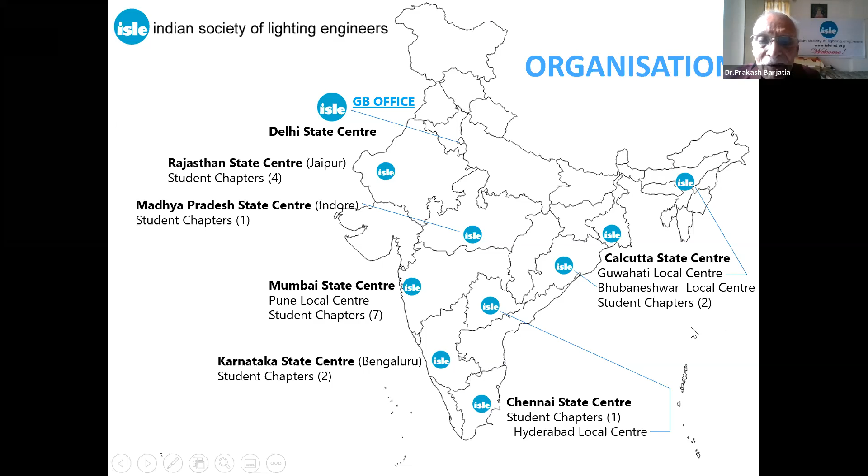ISLE works through 7 state centers covering all 4 metros, in addition to Karnataka, Rajasthan, and Madhya Pradesh. So these are 7 state centers. Then there is a provision of local centers at Bhubaneswar, Pune, Hyderabad, and Guwahati. We also have student chapters in different states. Today there are 17 student chapters in the country.

We are closely associated with the Bureau of Indian Standards, Ministry of Power and Renewable Energy. Also internationally, we are working together with the IES Illuminating Engineering Society of North America, Lux Pacifica, Institution of Lighting Engineers, IES, and the SAARC countries.

Our present governing body member of ISLE for 2015 to 21 is being led by Mr. Dilip Kumar, who is the CEO of K-Light Group of Industries. As far as the Karnataka Center, this program is being conducted by the Karnataka State Center, and the chairman is Mr. R.C. Krishnachari, along with Mr. K. Kailaslevan, Honorary General Secretary, and Dr. Vidya H.R., Honorary Treasurer. Other members include Mr. Satyendra, Mr. M.S.N. Swami, Mr. Bhavani Prasad, and Ajay Gupta.

This committee has taken over recently, and they are doing very good work. The first activity they have done is the MOU with colleagues at the national centers. As I mentioned, we are working closely on the National Lighting Code, and this is being done under the leadership of Dr. Rajat Mandal, Honorary General Secretary of ISLE.

Accepting the challenge of COVID, about a year back we started a certificate course in basics of lighting and illumination, a 6-month e-course, which was addressed by 63 distinguished lecture experts not only from India but from all over, and which was attended by 76 participants from all over India and also South Africa and Saudi Arabia.

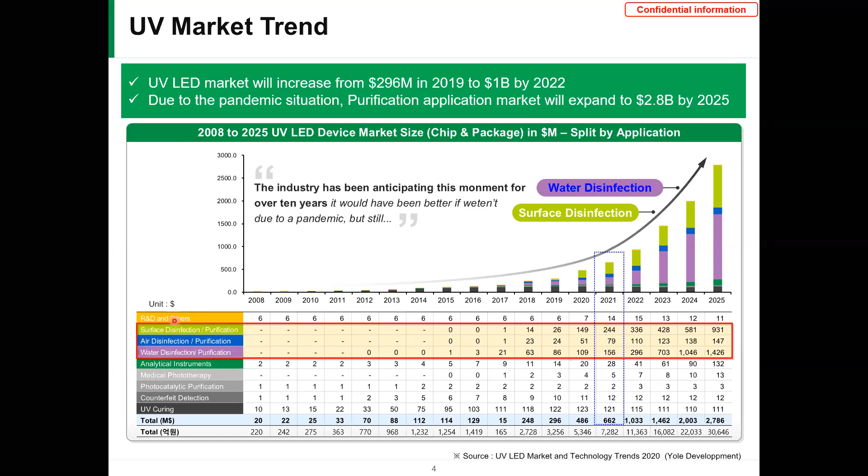So we are focusing on these three kinds of disinfection and purification applications. We compared the 2020 and 2025 UV LED device market size—air disinfection, surface disinfection, and even water disinfection will all grow hugely. So we are focusing on these three kinds of applications.

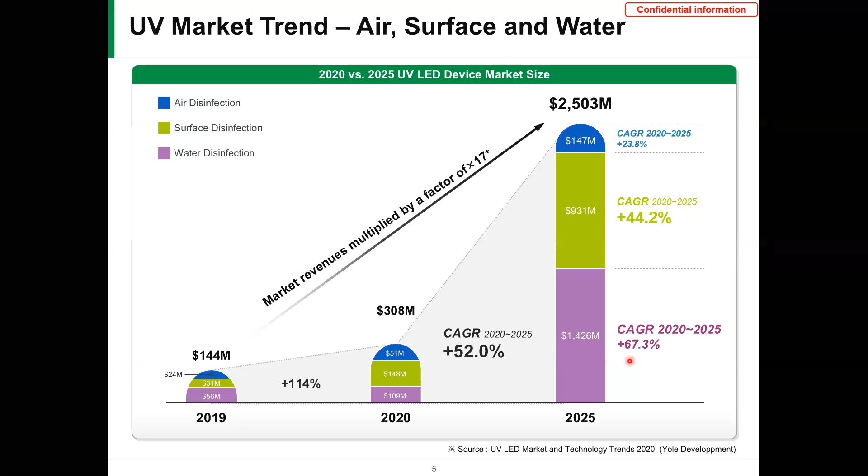So what is ultraviolet, like UV? UV is functional light. Sunlight delivers UVA and UVB to land, while the ozone layer cuts UVC. Due to this reason, UVC light cannot reach our land, so we cannot use natural UVC—we need UVC LED.

Currently, more people are using UVC lamps, but we developed a UVC LED. This technology is used in many small, adapted devices, so we can adapt it into everyday life, everywhere.

So UVA, UVB, and UVC are the different wavelengths. UVA is the 320 to 400 nanometer range, UVB is 280 to 320, and UVC is 200 to 280. We use UVC light for the sterilization function, and for UVA we use deodorization, like air purification with a photocatalytic filter, and some people use UVA light in insect traps, and some curing applications adopt UVA LEDs.

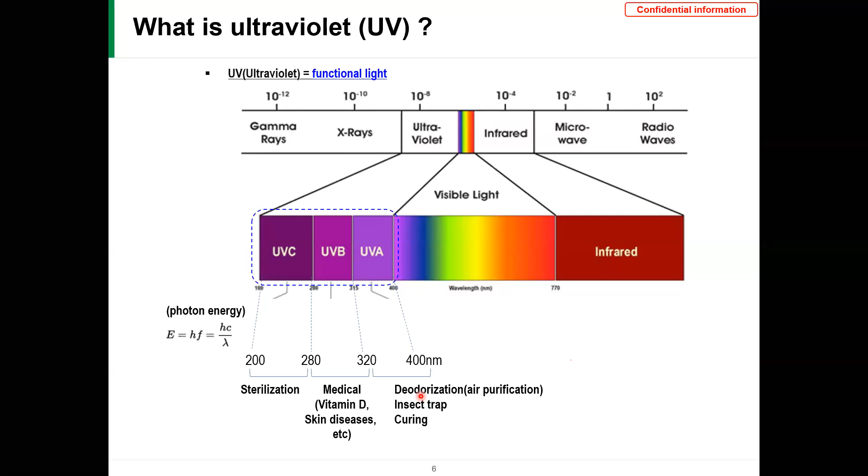So our company is leading the application, and we can be a solution provider for lighting, automotive, and IT applications like display, mobile, and IR. And the last one of our business model is UV, and we are developing UV systems or solutions to provide you. So for the Violeds technology, I will explain.

So the Violeds solution is for home appliances. All the home appliances: air purifier, refrigerator, air conditioner, even the dishwasher, some kind of water-using application. We can disinfect air, water, and surfaces, reaching 99.99%.

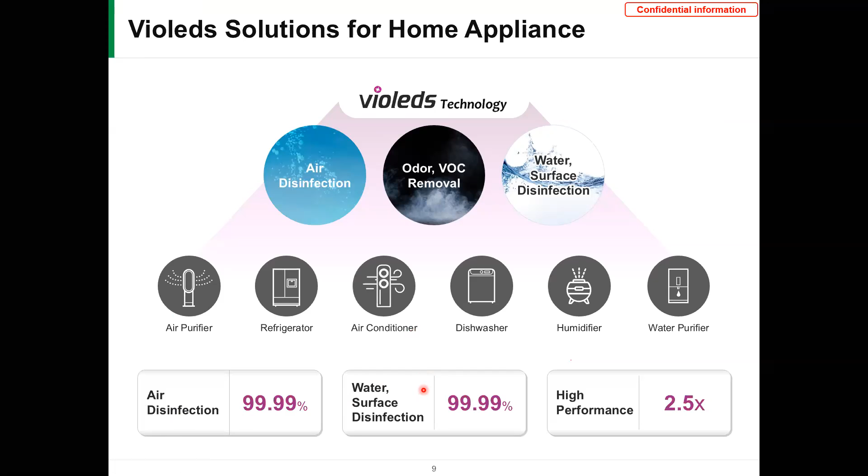So why do customers use UV LEDs? Compared to the conventional UV lamp, the UV LED is very small. That's the first good point, and a very good advantage is the warm-up time. With a UV LED you only input some voltage or current value, and the UVC LED can light immediately, whereas a conventional UV lamp needs turn-on time. Due to this, the disinfection time is delayed.

And the second one is heat generation. UV LEDs have low heat generation compared to the conventional UV lamp. And UV LED is an eco-friendly technology, so no mercury, no ozone, and the energy consumption is lower than the conventional UV lamp. Our only concern is the low power and higher price than the conventional UV lamp, so we are focusing on developing high-performance, low-cost versions of UV LEDs.

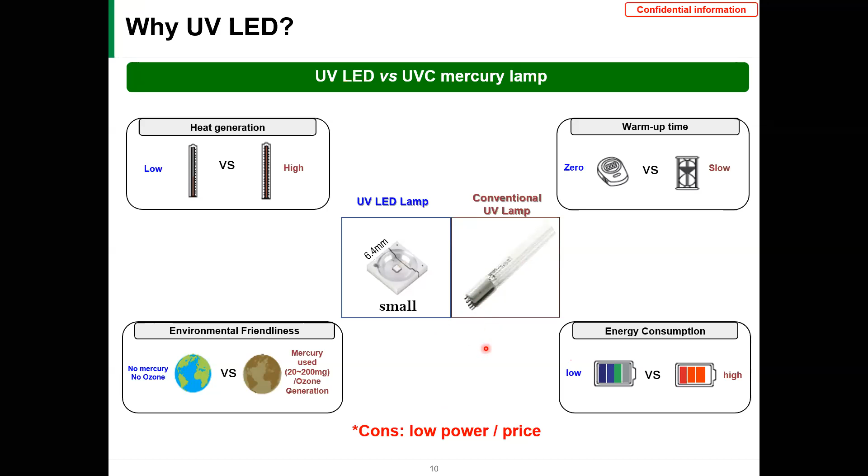So what is the Violeds technology? It describes the know-how in developing, manufacturing, testing, and validating UV products. We use different types of wavelengths, and we can provide distance, angle, power, and time. We combine these five kinds of factors, and then we can give the solution to our customer, and the customer adds value to their products and makes a lot of money. Yeah.

So what are the different disinfection methods? When UVC irradiates a surface, it damages pathogens like E. coli by breaking the DNA. So the next one is easy. In UV disinfection, the DNA structure is destroyed when UVC is irradiated.

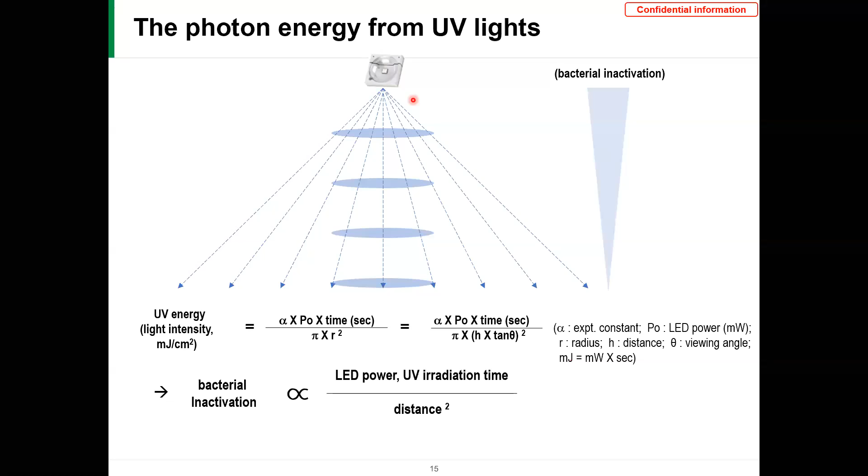So we have a simulation lab and a testing lab, so we can give you the solution or some guide to using our LED. We already tested the SARS-CoV-2 virus; the condition is 2 centimeters and virus suspension, and within 1 second we can sterilize with 99% efficiency against SARS-CoV-2.

So we have a lot of data, and we can guide you on disinfection, which wavelengths you can use, and what the disinfection time is. So this is the test result for SARS-CoV-2 in a Korea testing lab; the condition is almost the same, and we tested SARS-CoV-2 disinfection using our 100 milliwatt UVC package.

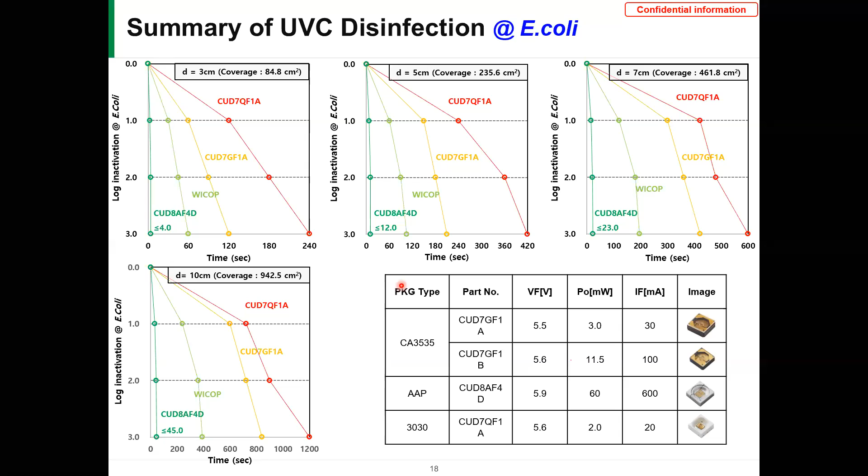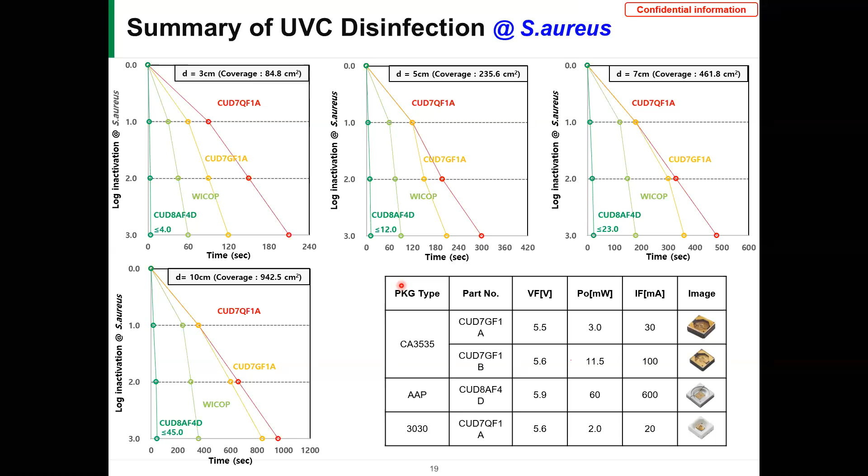So you can see our test results. Yes, we can guide you with this kind of test result. This is E. coli, and this is Staphylococcus aureus. Our internal lab can use these two kinds of bacteria, and if you need another kind of virus or a different type of bacteria, we can connect to our third party lab, or even in India, RC can help us with testing. So this is our very good solution that we provide to you.

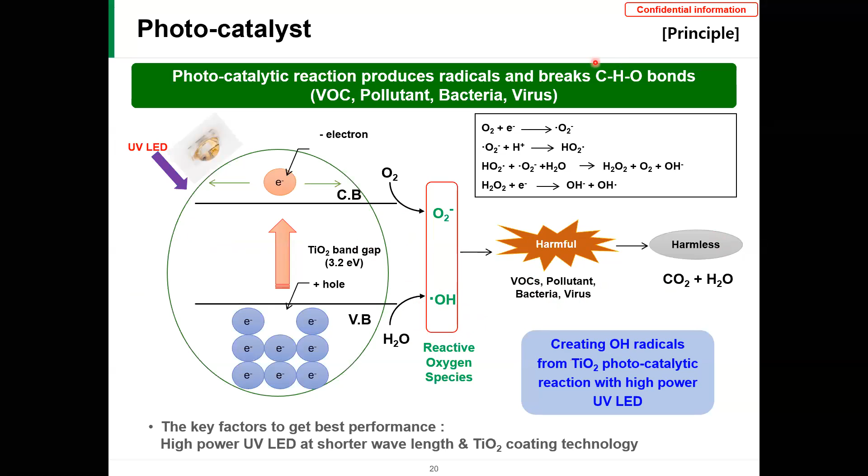And the last one uses UVC only, and this page shows the photocatalytic filter and UVA LED. This is titanium dioxide, and when we irradiate it with UV LED, titanium dioxide generates reactive oxygen species, which can remove harmful gases like VOCs and pollutants, bacteria, even the virus, and reduce some of the harmful compounds.

Our technology uses under 388 nanometers, and we use UVA 365 nanometer. Titanium dioxide absorbs about 70% at 365 nanometers, so we can use 365 nanometers. And this is the report showing we didn't generate ozone using the photocatalytic filter plus UVA and UVC LED. By the Korea standard, less than 0.005 micromole per mole, we didn't detect ozone. It's like a background concentration.

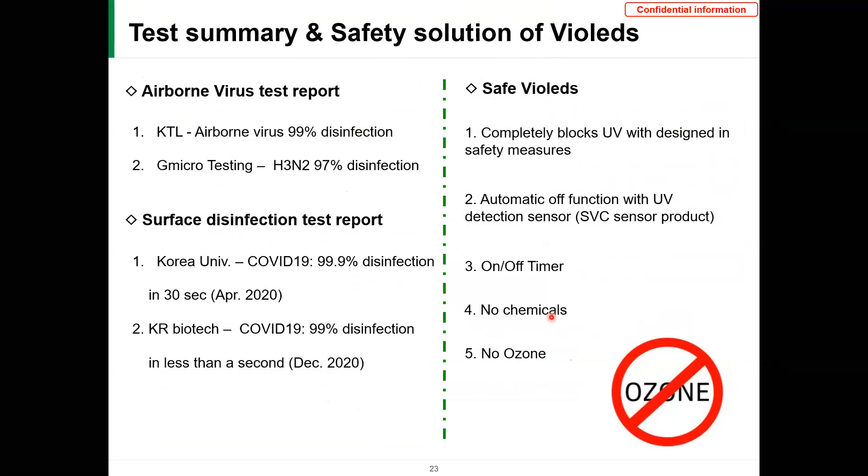So the test summary: our safe solution can kill airborne viruses and disinfect surfaces, a safe Violeds technology. Almost all home appliance companies use ionizer technology, and ionizer technology generates some ozone. Our technology has no ozone, and the lifetime is longer than ionizer technology. Our LED can disinfect bacteriophage in a very short time, like 30 minutes; ionizer technology takes 16 hours in 60 cubic meters.

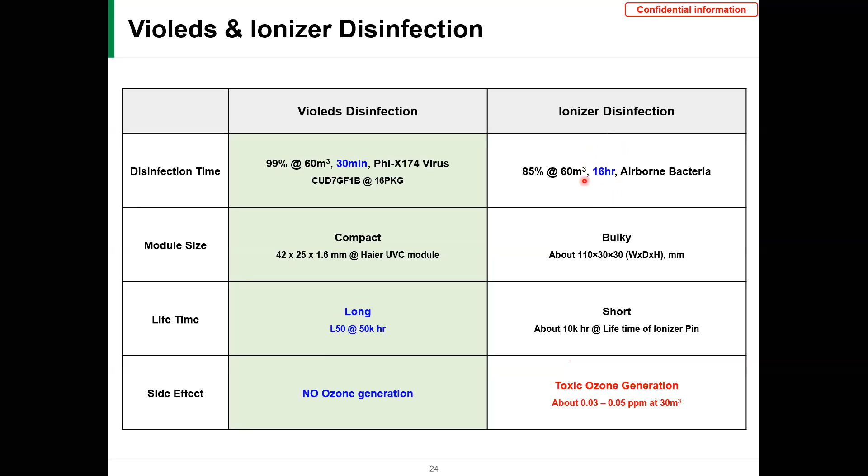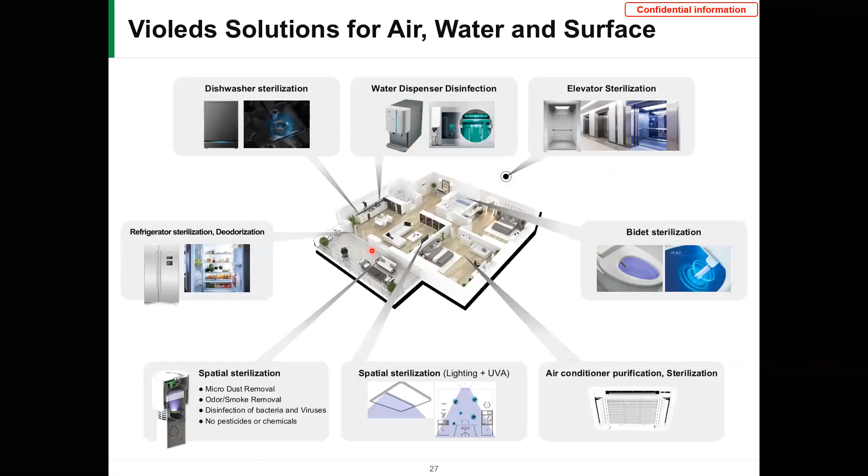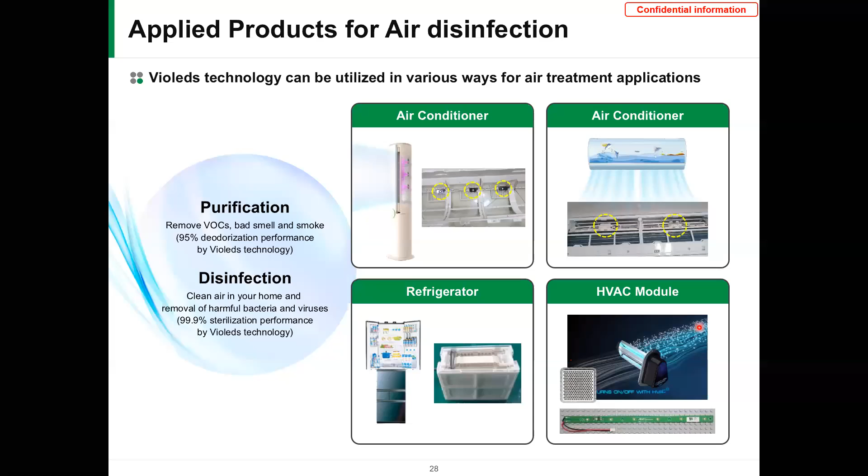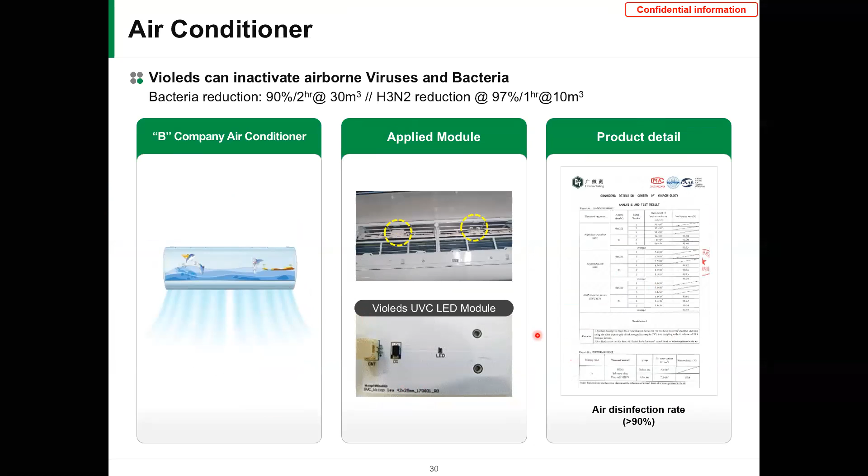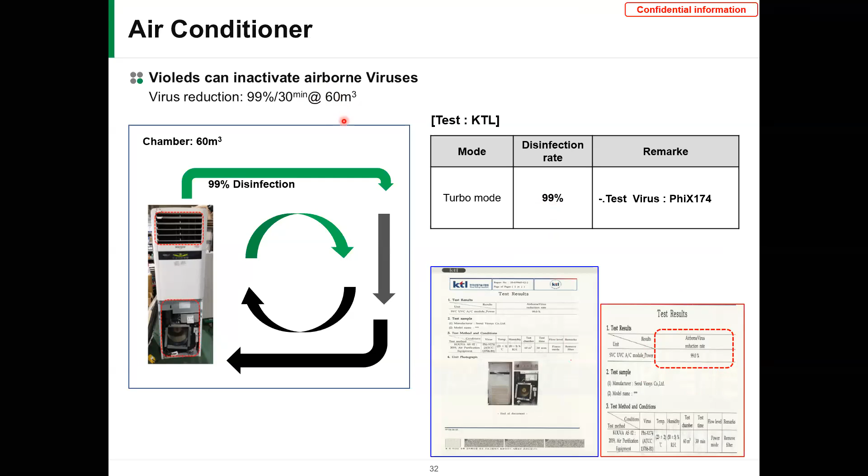This is the air conditioner. We installed our UVC LED in their system and tested the disinfection. We tested the virus in 60 cubic meters, disinfection in only 30 minutes. And we have solutions to disinfect the water dispenser and water tank, even the dishwasher and tumbler. And the water purifier can use it for the water tank, filter, water pipe, and nozzle.

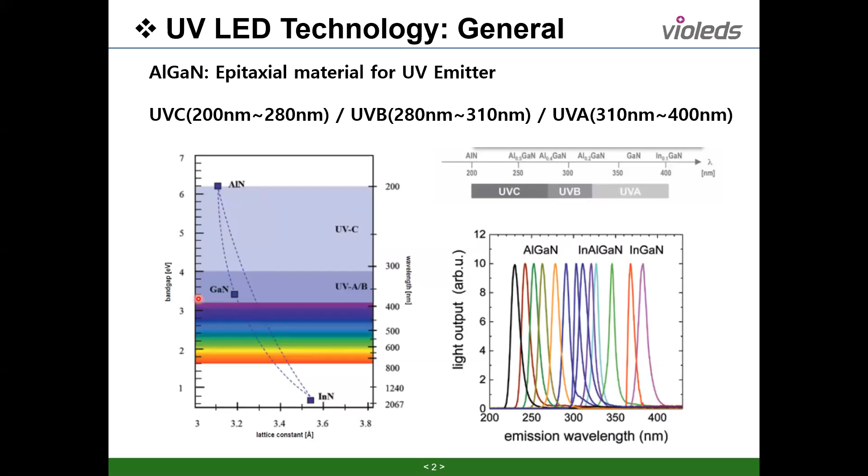So as I said, aluminum plays a very important role in making the UV LED. For our current UVC 275, the aluminum content is more than 50%, and gallium is another 50. Here you can see the SIMS data, with the aluminum and gallium composition. To make the LED quantum well, there is some ratio difference of the material between the well and the barrier, so for the 275, about 50% is aluminum, and the other is gallium.

So UVC is almost 50%, and for the UVA 365, the aluminum content is more than 5%. And there are some difficulties in making the LED when using aluminum content. You know that we grow the LED on a sapphire substrate. It means it's a different material. I think some of you know how difficult it is to grow a crystal layer onto a different material.

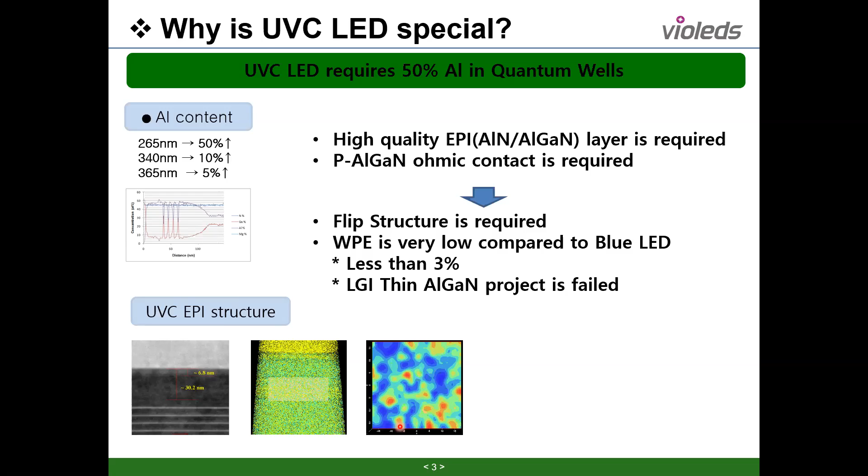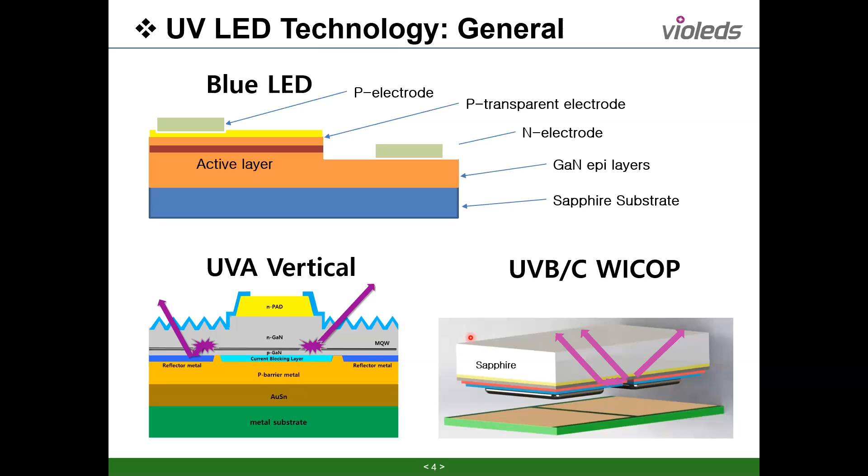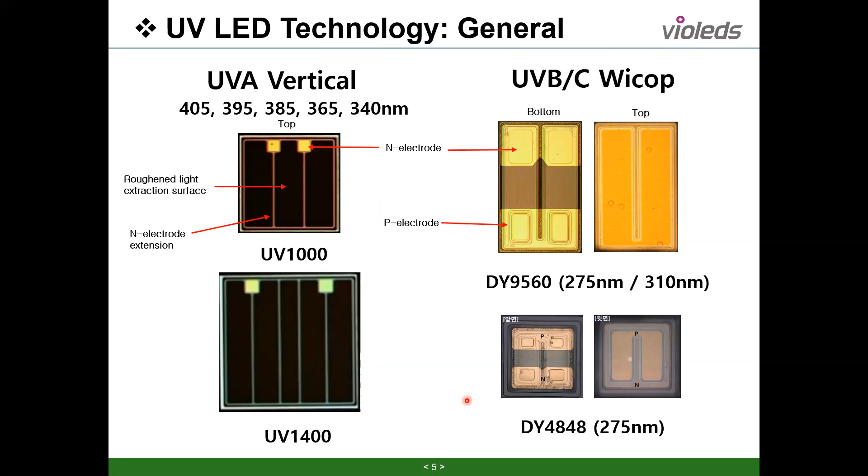The UV 1400 is the bigger size of the UV LED, our UVA product, and the DY4848 is the smaller size of our product. So currently we have two versions of the product depending on the operating power and current.

I said our flip chip is called WICOP. The reason we call it WICOP is that it's a wafer integrated chip on the PCB. Usually when an LED is first developed, packaging is always needed, and even cheap products still use external packaging, requiring wire bonding because the LED itself only has P and N electrodes that need to be connected to the packaging. This isn't very efficient, even though it's cheap and low power.

So currently, after the 2000s, we developed the vertical structure which I introduced on the previous page. Currently the vertical structure is used for UVA technology, so only one wire bond is necessary, since the other electrode, the P electrode, is on the bottom side. So you only need one wire bonding.

Another approach is the CSP, the flip chip onto one sub mount. Currently most other UVC producers use the CSP with a sub mount. To connect the flip chip to the sub mount, they need some special technology, and some additional packaging technology is necessary.

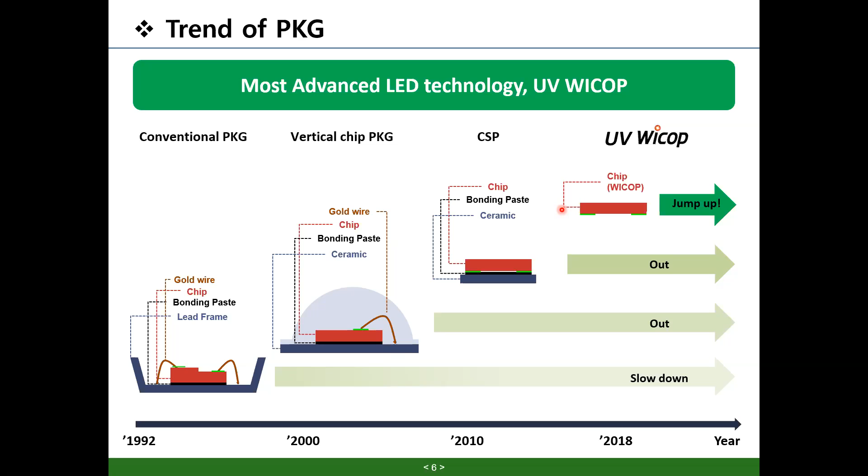Currently you can choose depending on your preference, like WICOP on board or the packaging. This is a comparison between packaging and WICOP. One big structural difference is the WICOP doesn't have any sub mount between the PCB, so it's very small. We have a patented technology for this, because there's no package, so we need a special protection layer there.

Another big advantage is that there's no package, so the light extraction is much better than a package would have. Also, high radiance power and high current driving is possible, so you can have some design flexibility.

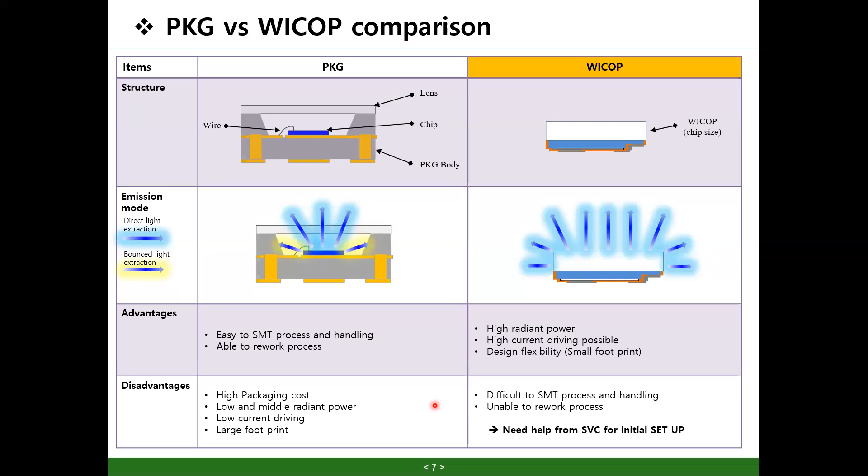Hello? I request you to please speed up as it is getting out of time now.

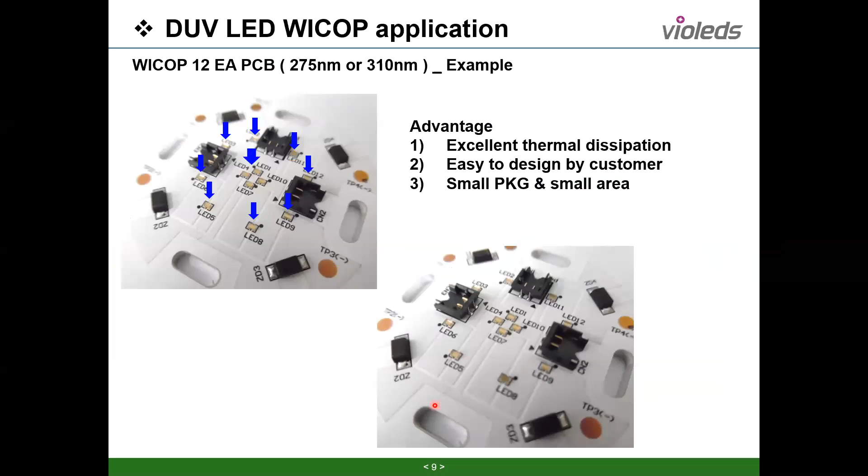Oh okay, so the next one is very simple - that's the rear image, bonded to the PCB, and this is the rear image of it. And the last one - well, I think I already have introduced much of our technology there.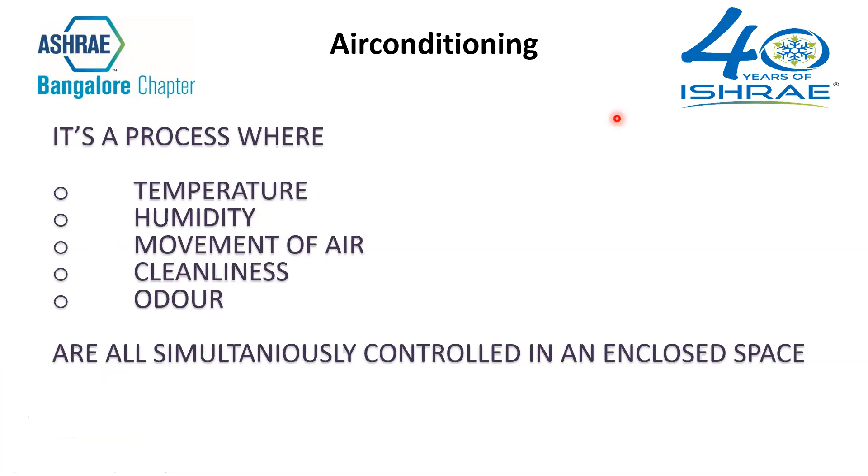Then the next thing is, what is a ton of refrigeration? All of us are aware that we need 1 ton of air conditioning system, or 100 tons, or 25 tons of air conditioning system.

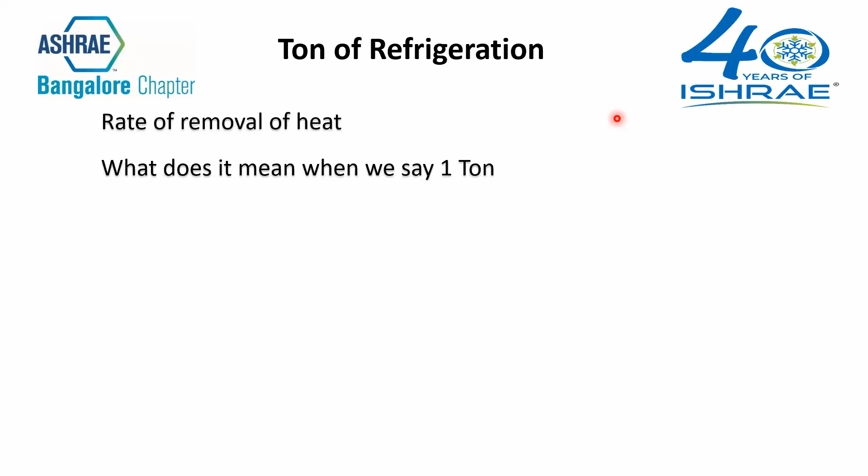What does it really mean when we say 1 ton or 1 ton air conditioning system? 1 ton air conditioning system means it's the rate of removal of heat. That means if you have a 1 ton air conditioning system, you can remove 12,000 BTU of heat in 1 hour from an enclosed space.

I would just like to repeat this. When we say we have a 1 ton air conditioning system, it means that you can remove 12,000 BTU of heat in 1 hour from that enclosed space. In other words, if you have a space which has about 12,000 BTU of heat inside that room, and if you have to remove that 12,000 BTU of heat in 1 hour, then you need a 1-ton refrigeration system or a 1-ton air conditioning system. In other words, it's about 3.5 kilowatts or 1.25 HP.

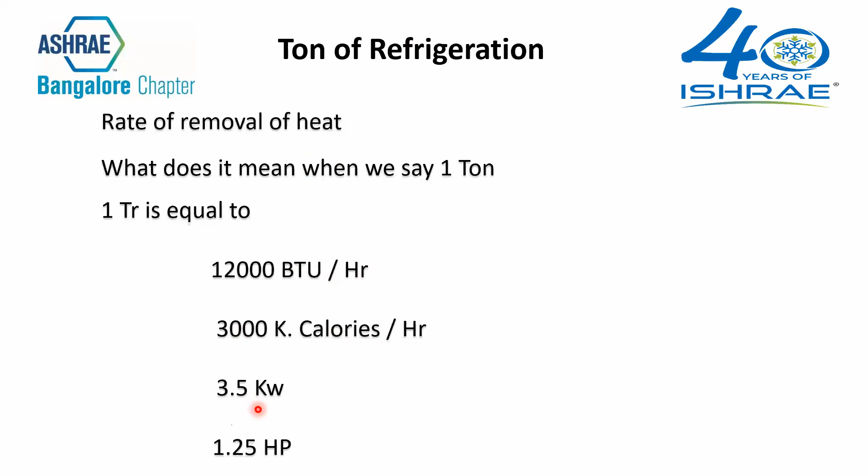So what is heat? We just discussed that a ton of refrigeration is the rate of removal of heat. So what is heat? Heat is a form of energy. It can neither be destroyed nor created, but generally moves from a warmer substance to a colder substance. The unit to measure quantity of heat is the British thermal unit.

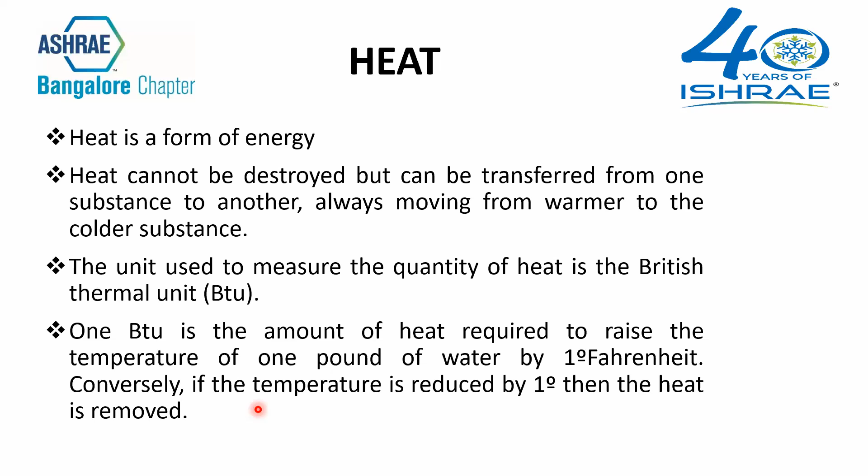1 BTU is the amount of heat required to raise 1 pound of water by 1 degree Fahrenheit. That means if you have 1 pound of water, and if you have to increase the temperature of that water by 1 degree Fahrenheit, you need to add 1 BTU of heat. Or in other words, if you have to remove 1 degree Fahrenheit from 1 pound of water, then you need to remove 1 BTU of heat. So this is the definition of BTU.

So then we move to what we just discussed, that we have to remove heat from an enclosed space. So what is the heat load, or what is the cooling load? Heat load or cooling load, the terminology is the same, even though it is heat and cool. Meaning-wise, as far as our language goes, both are the same. We call it either the heat load or the cooling load. Heat load and cooling load is the quantity of heat to be removed from an enclosed space. It includes both sensible heat and latent heat.

It is very, very important. There are 2 types of heat, namely sensible heat and latent heat. We have to remove both sensible heat as well as latent heat from a confined space if we have to achieve an air conditioning process or refrigeration process. It is also known as the cooling load, generally expressed in BTU per hour, as explained earlier.

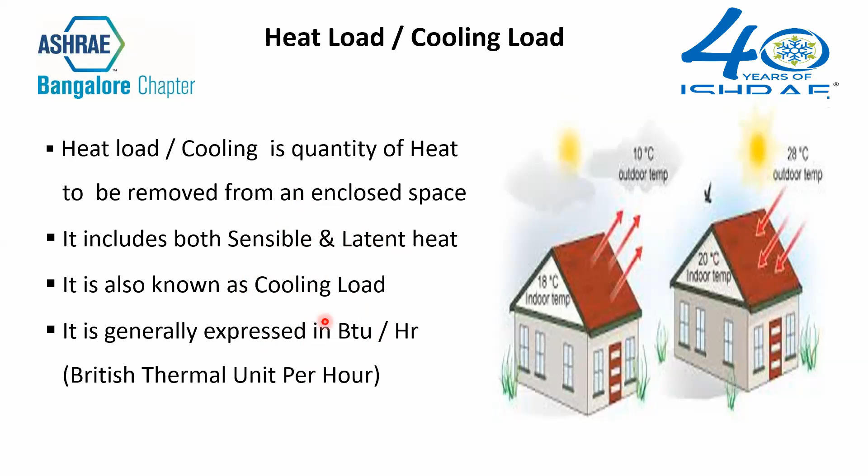So what are the major components which come into this heat load or cooling load? Let us try to understand. The first one is the heat coming in through the solar. It is very, very important, especially in this platform. As we move on, let us understand. I would like to call this the light source or the heat source through your solar lighting.

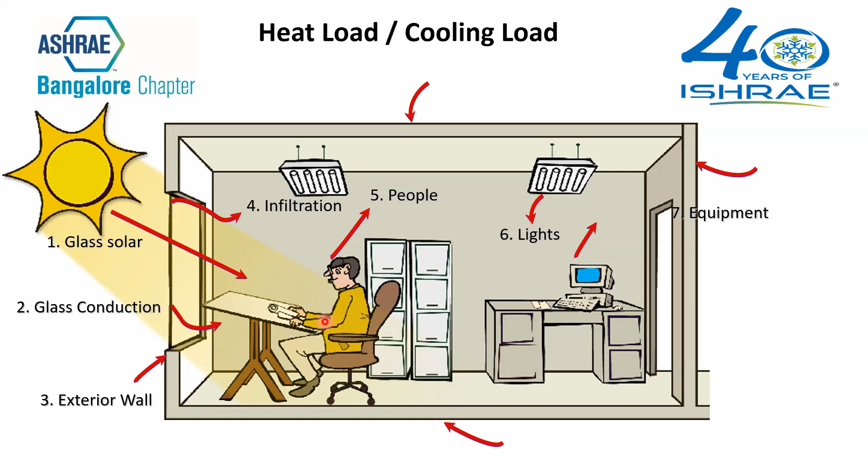Then the next one is the glass conduction, again related to this webinar what we are talking about. Then we have exterior wall. Then we have infiltration. Then we have people, that is called the occupancy load. Then the most important is again the lighting load, what we would be talking more about in this particular webinar. Then we have equipment load. Then we have the partition walls. We have the floor, that means heat emitted from the floor. And then finally the roof.

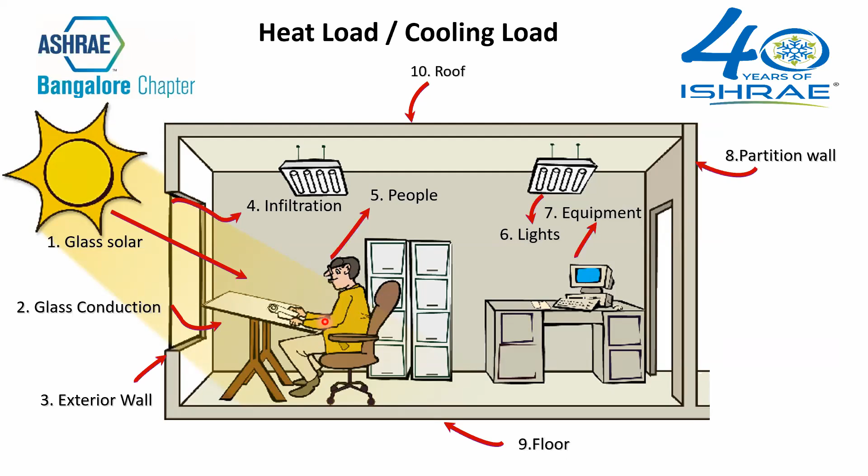So these are the various points which we need to consider when we do something known as a heat load or a cooling load. So what are the various types of cooling loads or heat loads? This is known as the room internal load, the occupancy load, the lighting load, the equipment load, the infiltration.

Infiltration load is nothing but, for example, you have a window, in between the windows you have some gap, or you have a door. At the top of the door or at the bottom of the door, or even if the door doesn't close completely, there are some small gaps. So whatever air that leaks through is known as the infiltration load. And then the system gain load, for example, you have a fan motor within the air conditioning system which generates some heat.

You have a blower which would generate some heat because of friction. Then you have air which is passing through the ducts which can also generate some heat. These are known as the system gain heats. And then the miscellaneous sources, then the outdoor load, that is your ambient conditions, and then the fresh air or the outside air, which we generally consider when we take up the heat load calculation.

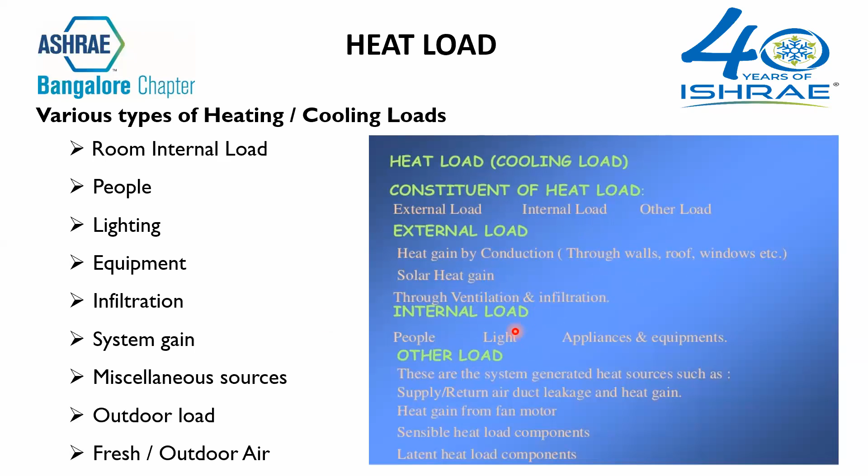Then, why is it important that we need to collect the orientation of the building? That is the latitude or the longitude of the building, because the heat that comes through the radiation of the sun plays a very, very important role. For example, let us say you have a huge French window to bring in a lot of light during the daytime, either on the east or west. Now that would bring in a lot of heat through your solar heat gain.

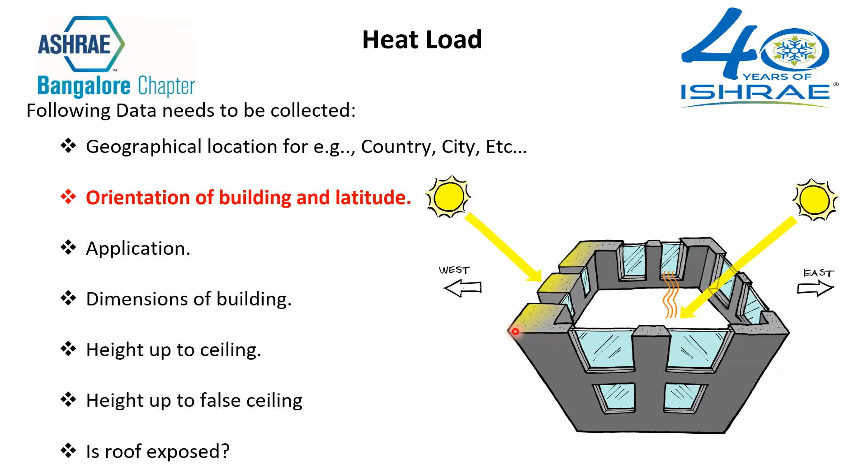So it is very important for us. I'm not telling you it is not right to have it. You can have whatever you want to have, but we need to consider this aspect when we do something called a heat load, and this plays a very, very important role. Then the dimensions of the building, height up to the ceiling, height up to the false ceiling, whether the roof is exposed or covered. Now there are certain things which are very, very important, which are flashing in my presentation when we talk about data.

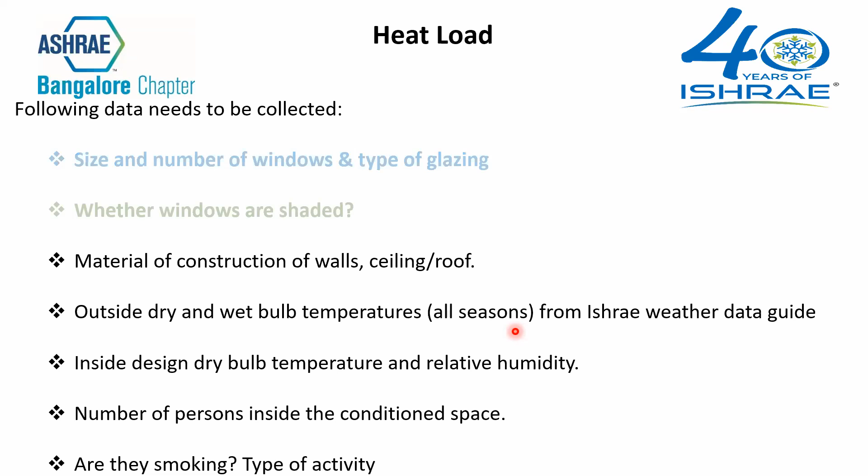The size and number of windows and the type of glazing. Again, this plays a very, very important role because the type of glazing decides the amount of heat that is coming in, whether it is shaded, whether it is tinted, whether it's a 2-pane glass. I will discuss more about this during the slides. Then the lighting load and the type of light, what type of internal lighting we are going to use. I'm going to discuss the various types of lights which contribute to our heat load.

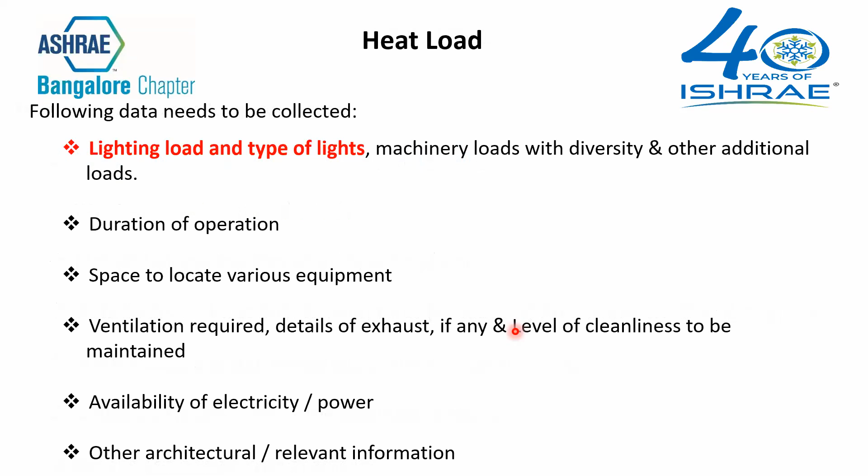Now, then the solar heat gain through the glass, again very, very important for us, that is known as the solar heat gain. Then, while calculating the heat, the following conditions play an important role, like I had discussed earlier: heat gain through conduction through walls, solar heat gain through light, and the internal load. The ambient temperature also varies in different places. This also again plays an important role.

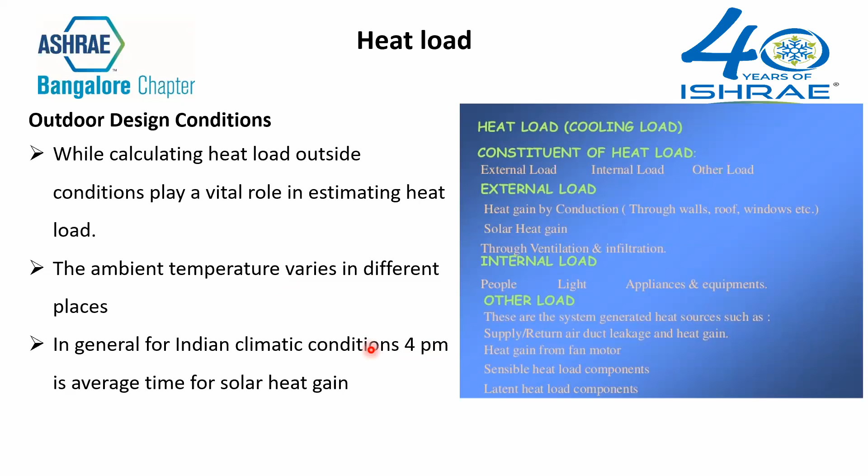For example, the capacity of the air conditioning system required in Bangalore may not be sufficient when you go up north, where your ambient temperature goes up to 50 degrees. Whereas in the south, the maximum ambient temperature in Bangalore or Chennai, or to some extent even the metros, is around 35 to 37 degrees. When you go to remote places, the ambient temperature varies anywhere between 40 to 50 degrees centigrade. So the capacity of the air conditioning system may not be the same. And generally the time considered is 4 p.m. as the peak load for the air conditioning heat load calculation.

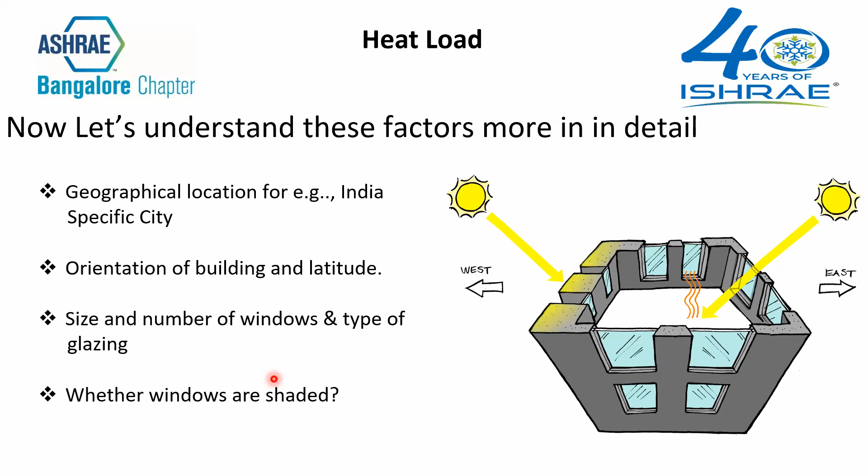Then, now, how does this matter? The solar factor, that is the K factor or the watt per square meter, what we calculate here, I'm just highlighting here. If you look at the simple table, which I have taken this reference from ASHRAE 90.1 for LEED buildings, what it says is, let us take for example, if you have a wall facing north and you have, say, 126 watts per square meter at 40 degrees north latitude, that is the heat being emitted through the glass. Now, this is what I said varies from location to location.

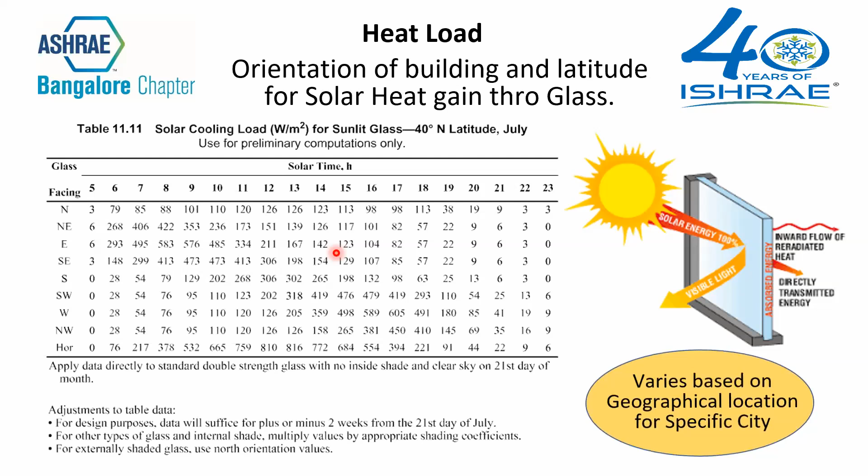As you move from different locations to different locations, this data keeps changing. And all these data are available for specific city and specific location based on your latitude and longitude in your ASHRAE table, that is 62.1 or 90.1. And this table is just a representation from that. Now, how does it impact on heat load or the solar heat gain through glass? Please understand, this can easily increase or decrease about 50% of your air conditioning load.

Let me say, for example, if you have an air conditioning space of 1,500 square feet and you need about 10 tons of air conditioning system to that place, with a normal lighting, the minute you want to bring in sunlight or you increase the glass area, even if you increase the glass area only by about 30%, your air conditioning can increase to as high as 50%, because again, if you have a window on the west,

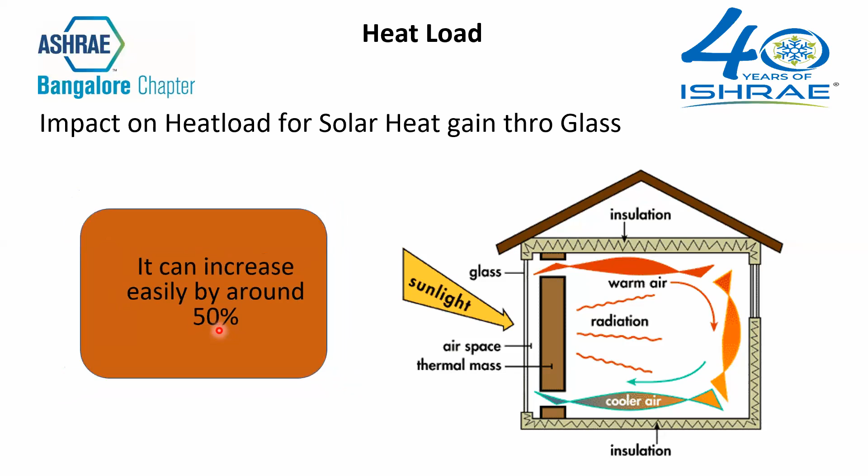or if you have glass area on the west or the south or the east or the north, during, in our Sanskrit language, we call it Uttarayan or Dakshinayan, the sun moves from east to west via south in Dakshinayan, and the sun moves from east to west through north in Uttarayan. So this plays a very, very important role in defining the solar heat gain through the glass.

So how do we reduce the heat through the glass? The options we have are shading of glass. We can have Venetian blinds or curtains, or we can have multiple panes. This is just a diagrammatic representation here. If you see, you have a shaded glass here. You have sun control films today, which you get from as low as 10% heat rejection up to 90% rejection. You get reflective coated glasses, which disseminate or reflect the heat. It means that it doesn't absorb heat.

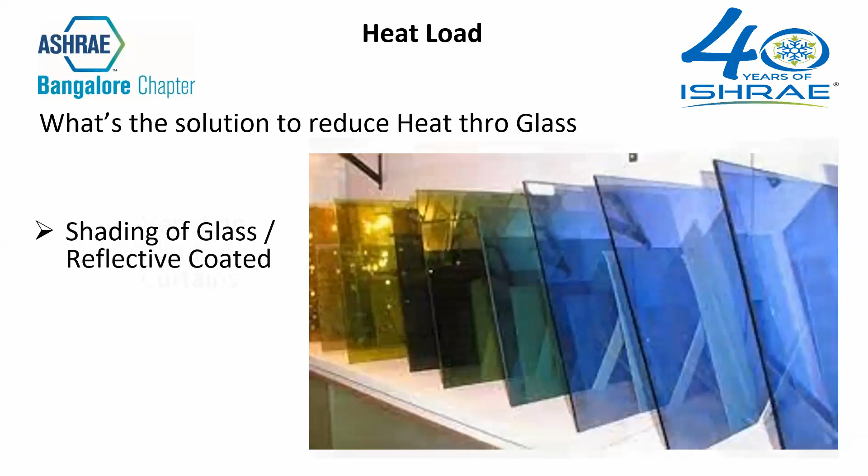Or you can also have various types of Venetian blinds or curtains, which you can use to make it look aesthetically nice, as well as reduce the heat that comes through the glass. You can also have multiple panes. Of course, this is quite expensive, but this is the most effective way, because you are creating vacuum in between these two panes. And as long as you create vacuum between these two panes, the heat does not transfer through these panes. So this is how it is beneficial to have multi-pane glass windows, which is the most effective in reducing the heat through the glass.

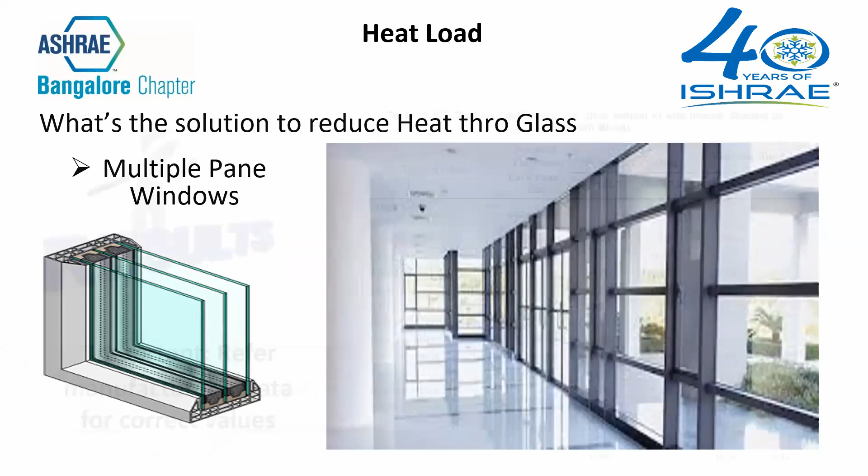So what are the results? If you look at the watt per square meter we are considering, for the various types of glasses we use, single pane, thickness, interior shading with Venetian blind, it has reduced drastically when you compare it with the previous table of 11.11 and with 11.12. However, please note something very important which I have mentioned here. You will have to refer to the glass manufacturer's data, where it gives you the correct value, we call it the K value.

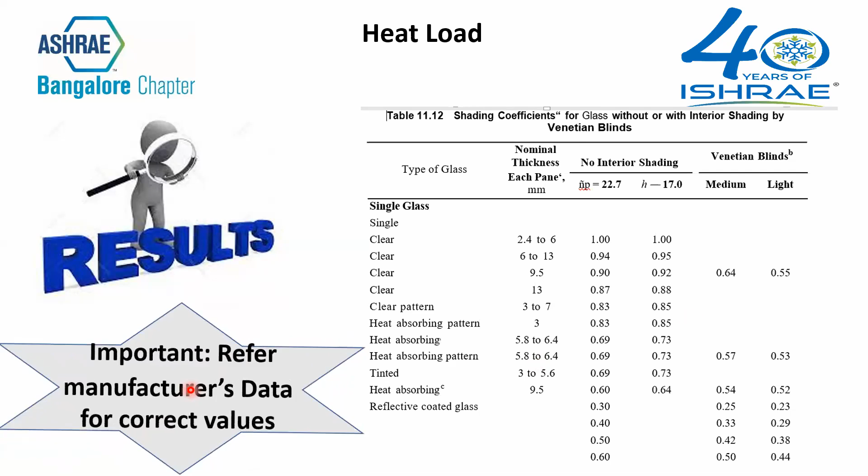It gives you the correct value of thermal conductivity, which needs to be considered. When you have, say, clear glass or coated glass, based on the coating, whether it is double coating or single coating, single pane or double pane, your K factor varies, or your watt per square meter varies. So this is very, very important for us to understand, that we need to look at the glass manufacturer's data to get the correct K value or factor to consider.

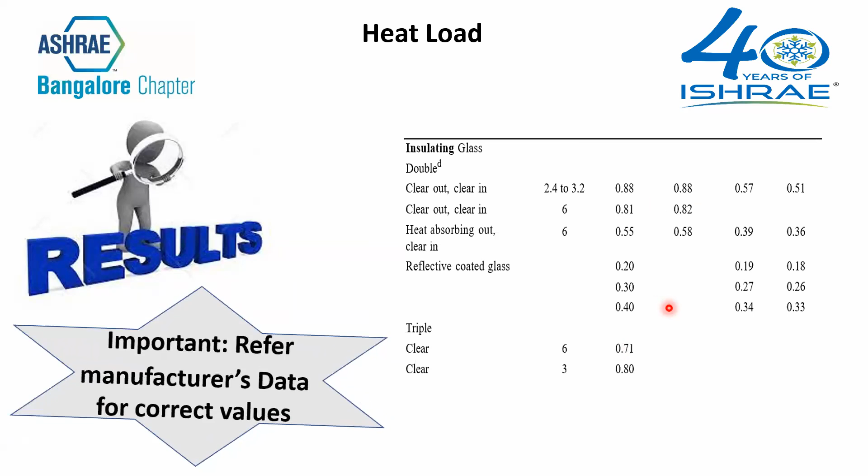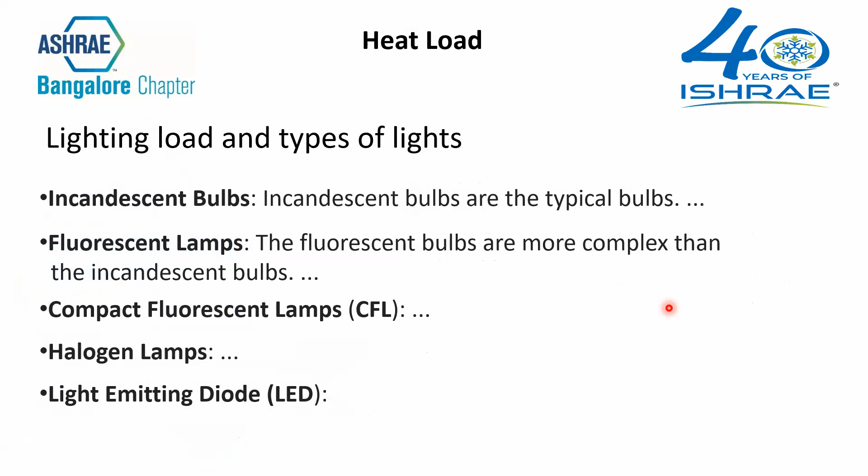Then the lighting load, you have various types of lighting. So from the sunlight, we move on to the artificial lighting now. We have incandescent bulbs, we have fluorescent lamps, we have compact fluorescent lamps, that is the CFL, then we have the halogen lamps, and we have the light emitting diodes.

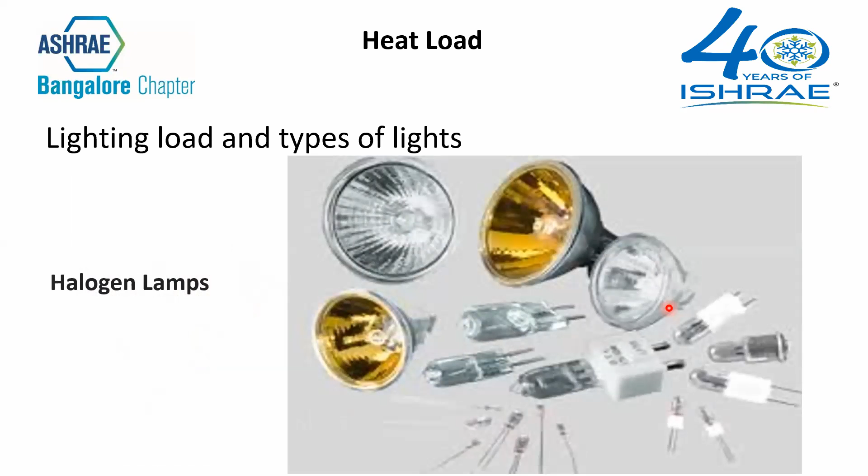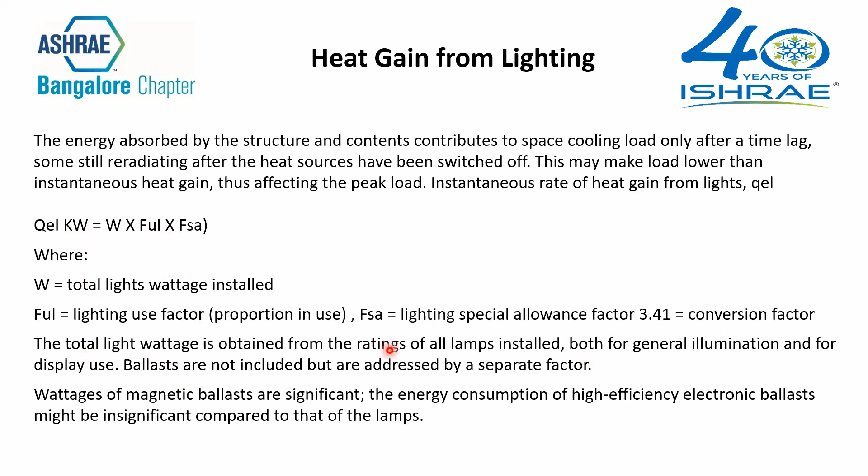So this is a simple formula which tells that kW = W × FUL × FSA, which gives you the total kilowatt of the light, that is the heat that is being emitted by the light. Then the light use factor generally is 1 watt per square feet, and if you are using special lamps with special ballast, we have a separate formula which needs to be considered. So all these are very important when we calculate the heat gain from the lighting source.

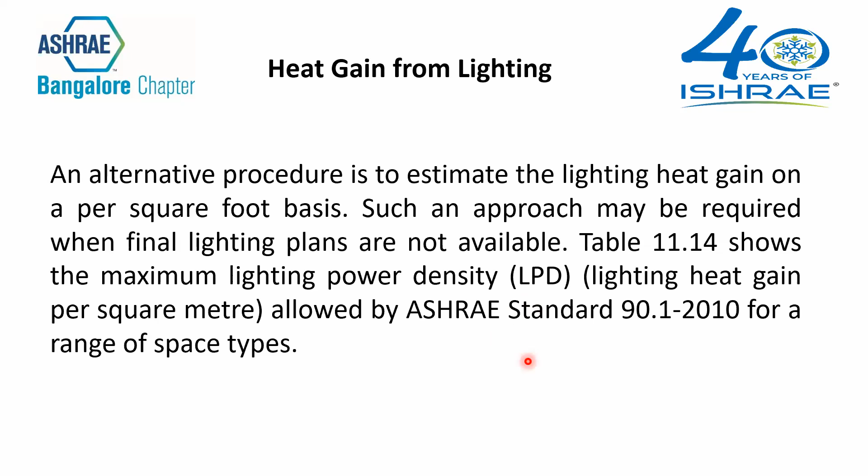All these formulas are available in our ASHRAE 90.1 guidelines, or in the handbook of designs from ISHRAE. Generally these handbooks have all these tables which give you different values for different kinds of lighting solutions and different kinds of heat emitting sources. So the table, like I said, ASHRAE 90.1 gives you the light heat gain per square meter or the lighting power density, which we need to consider, and then take it forward when we calculate the heat load for design.

So lighting from various sources, let's say for example, you have a hotel, you need to have different lighting. In a bar and restaurant, you have a different lighting, that is called diffused lighting. Then you get into a jewelry store, you have a very bright light. You get into a showroom of textiles, you have very bright light. So each and every kind of application, for example an auditorium, a convention center, a gymnasium, a motion picture theater, all these have different values of watt per square meter.

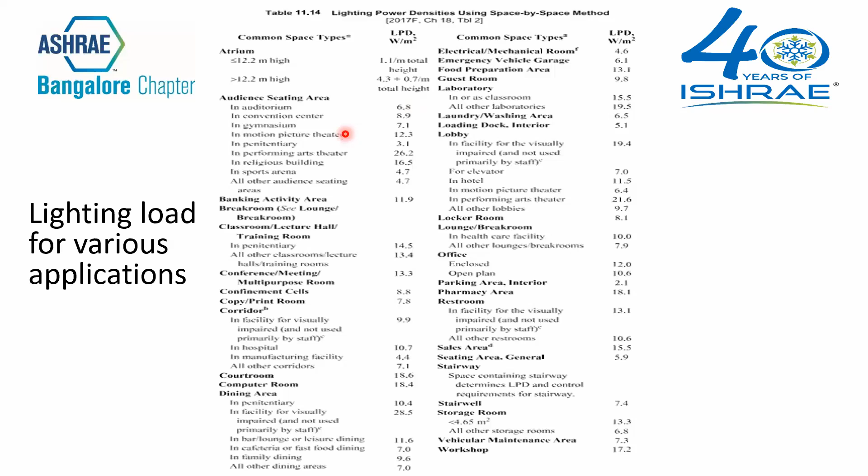For example, in an auditorium you use 6.8 watt per square meter lighting. For a sports arena, you use 4.7 watt per square meter. So every area has got a defined value, and this is available in table 11.14 in ASHRAE 90.1 standards. Similarly, in a healthcare facility where you have a treatment room and examination room, you need about 18 watts per square meter. And in a recovery room or a physiotherapy room, you need about 12.4 watts per square meter.

Similarly, for various applications, manufacturing facility, low bay area, high bay area, or different facilities, you need to have different watts per square meter lighting load, which needs to be considered for heat load. Then again, what type of light we are going to use, whether it's a fluorescent light, a luminaire light, a down compact light, or non-fluorescent. So various factors are considered with various radiative fractions when we take up the lighting load for heat load.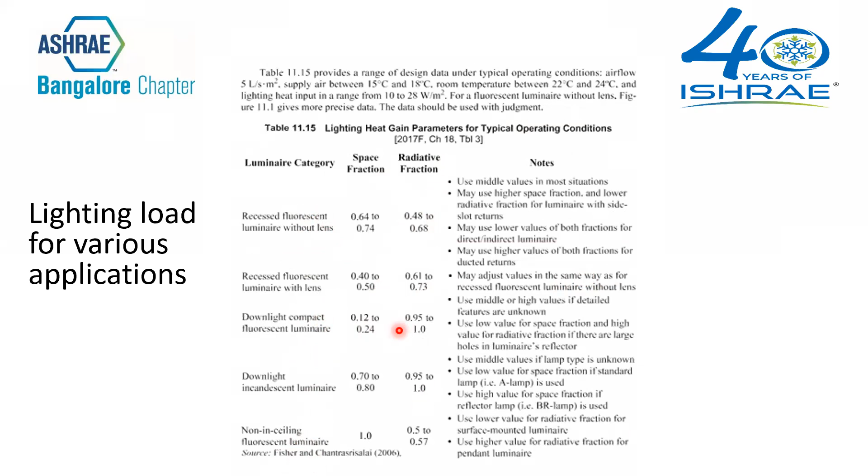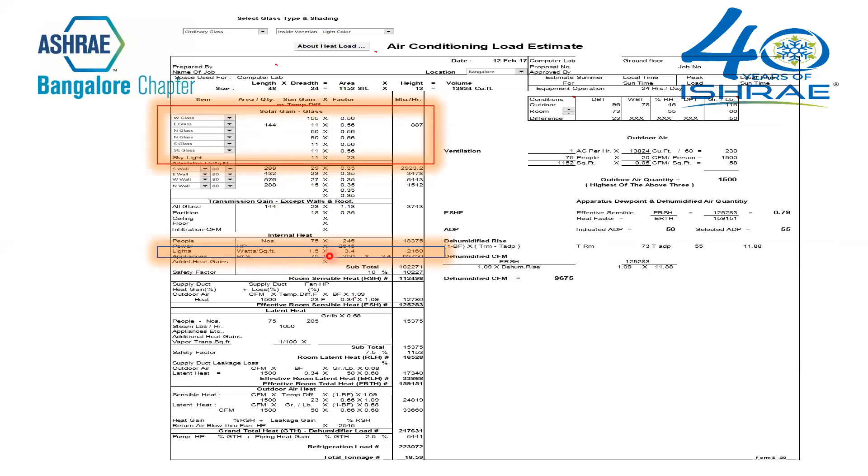So again, coming back to my last few slides, this is where we capture the data based on the various orientations of the building and the various heat coming in through the glass, and then finally the type of light that is used, or the watt per square feet or watt per square meter that we need to consider. With this, I come to the end of my presentation and we are open to questions.